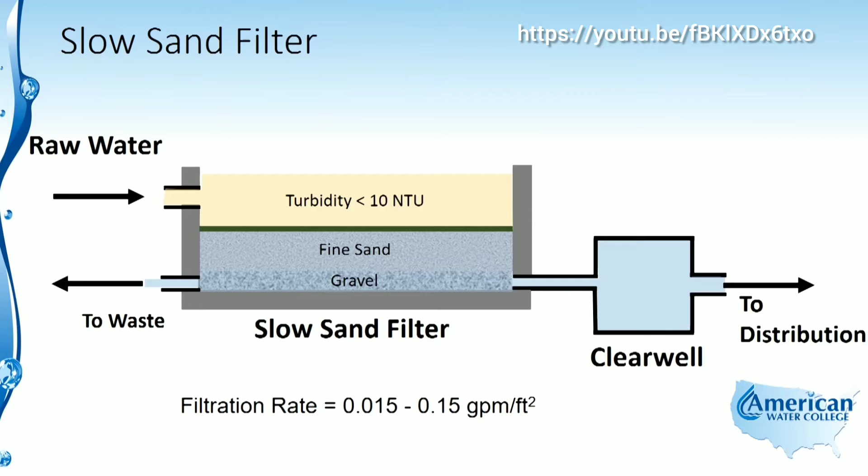So for a slow sand filter, as its name indicates, the filtration rate is very low. It's in the range of 0.015 to 0.15 gallons per minute per square foot of filter surface area. So it's got a very low flow rate in relation to the surface area of the filter, and that's why it's called a slow sand filter. And rapid sand filter.

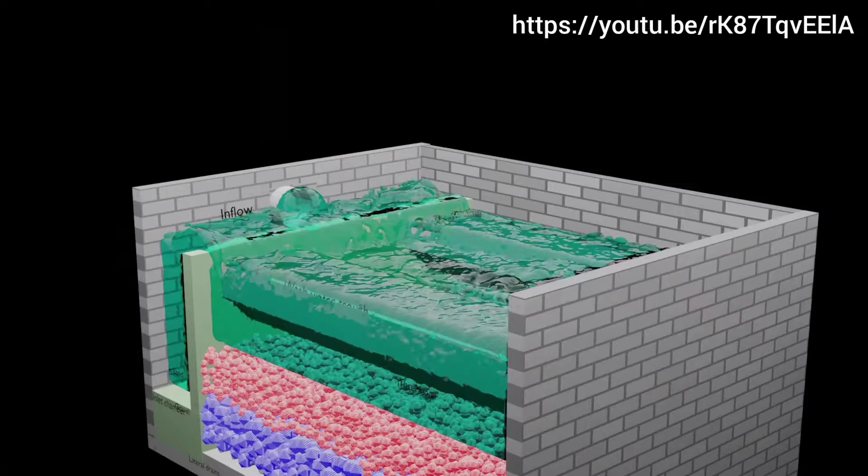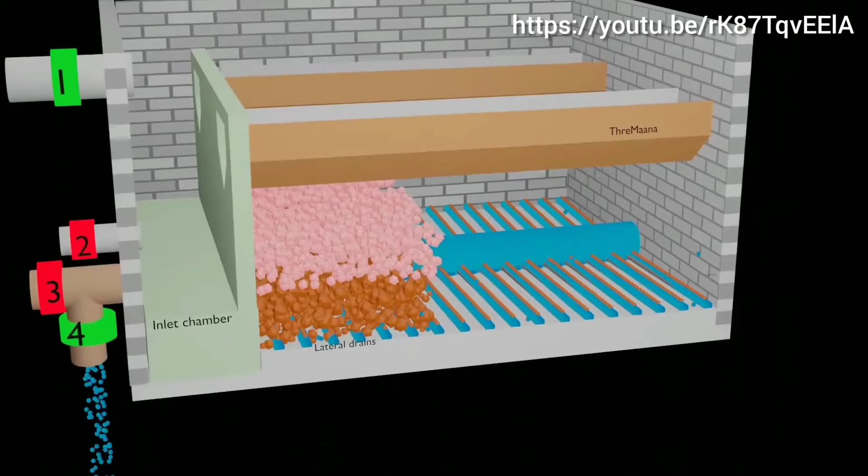Slow sand filter and rapid sand filter. Here, for wastewater, it is the trickling filter. Sometimes the filtering process may be analogous, but for potable water, if the water contaminants have to be removed, the method of filtering is either slow sand filter or rapid sand filter. Slow sand filter is used for small treatment plants, and rapid sand filter is used for

townships, towns, municipalities, corporations, where you want to have the yield of filtered water more, around 1000 to 2000 liters per hour yield after filtration. In slow sand filter, you will get only 200 to 300. So here it is almost 5 times. But in slow sand filter, after the process of filtering, the disinfection intensity is less. But in a rapid sand filter, the disinfection has to be more intensive.

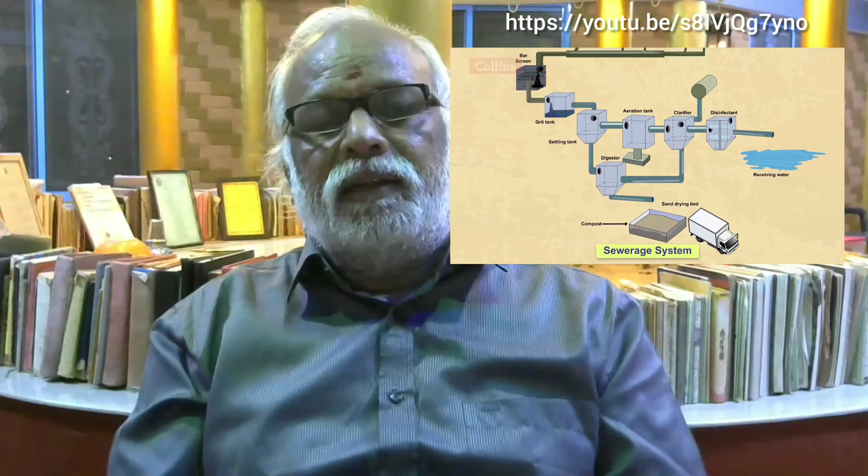Now we have to come to wastewater. So this confusion will be always there when you refer filtering. All other things are same. The coagulation, flocculation, disinfection, primary disinfection, secondary disinfection, all other things are same. Filtering, then storing. So the effluent or the sewage. But here the treatment is not only coagulation or clarification, clarifier. Coagulation, clarifier, sedimentation, filtering. That filtering part

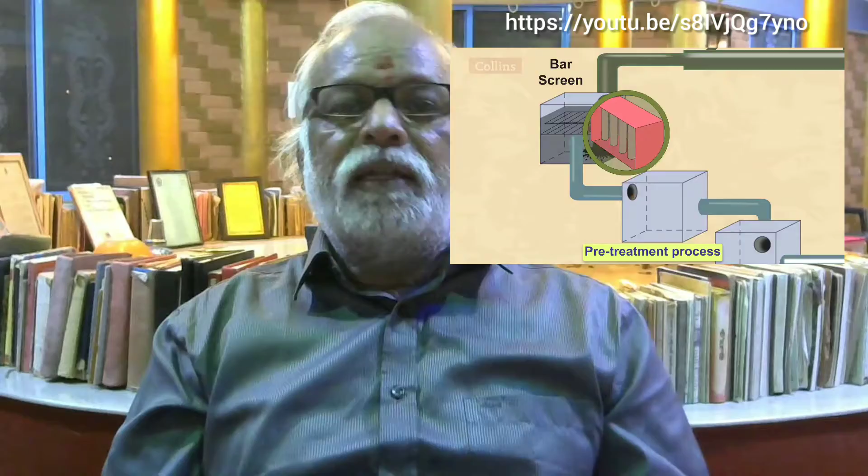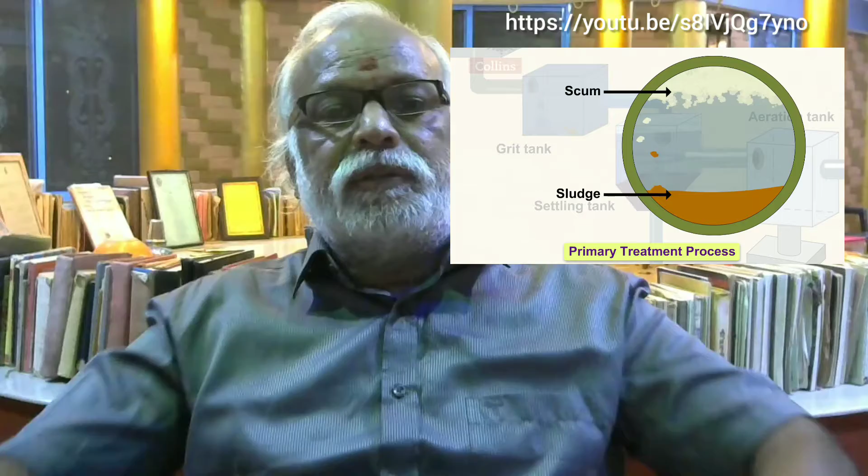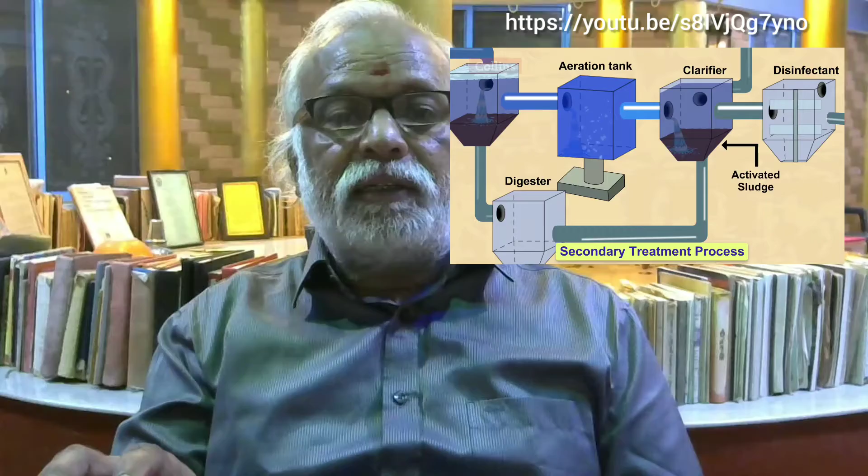unlike slow sand filter and rapid sand filter, it is more biologically oriented. You have a biomass or biofilm. You use bacteria and protozoa, similar organisms, to treat the wastewater. You create an environment by which these bacteria fight with the wastewater, then the wastewater contaminants are removed. These bacteria will work in 2 environments, in the presence of oxygen and in the absence of oxygen. Certain bacteria will thrive in the absence of oxygen. Certain bacteria will thrive only in the presence of oxygen.

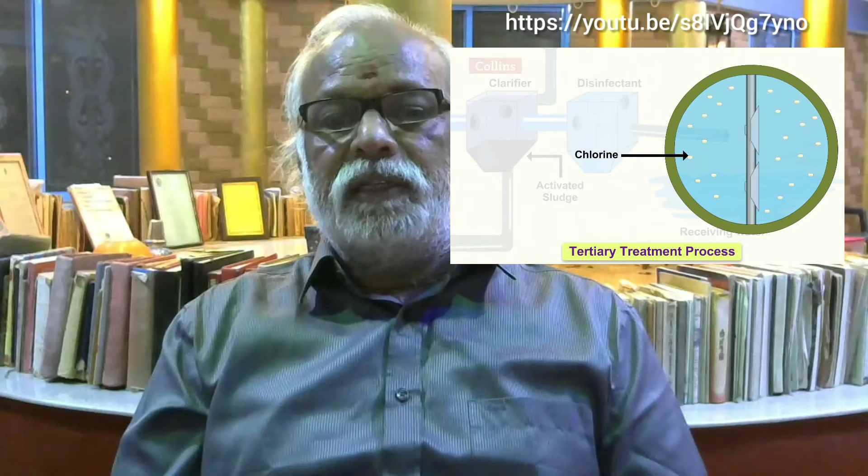So the treatment which works in the presence of oxygen is called aerobic process, and which doesn't require the presence of oxygen is known as anaerobic. So there are 2 types of digestion or decomposition of this biomass. One is aerobic digestion, another is called anaerobic digestion.

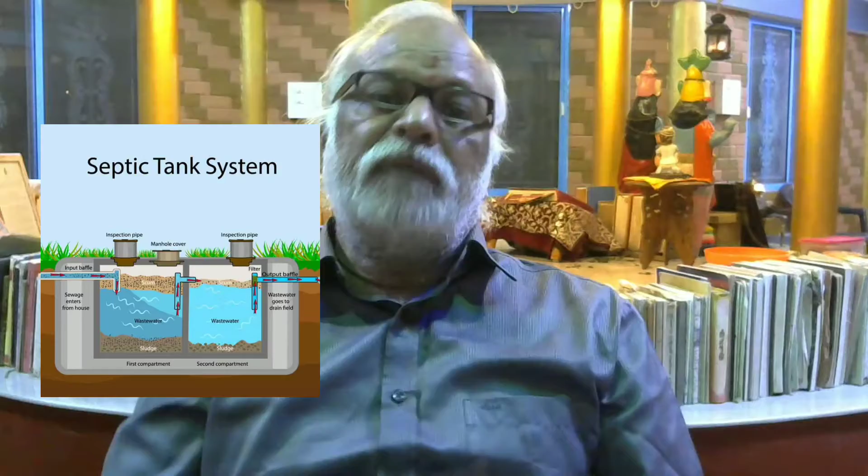The septic tank. Domestic, suppose we take the sewage, septic tanks, the toilet, human excreta, after flushing, along with the water goes through a pipe and gets settled in the septic tank. Sometimes you will have only one well, which is known as the leach pit. And you will have a small air vent. It is not for the supply of oxygen, but to enable the flow and avoid clogging of the closet. So anaerobic bacteria thrive there in the septic tank and leach pit, and decomposition takes place because of anaerobic bacteria,

the biomass. Ultimate result, methane and carbon dioxide. In addition to the sludge, you will have methane gas and carbon dioxide. This methane gas can be used. Similarly, with cow dung, you have biomass digestion cylinders using cow dung, animal dung. You will get methane gas, which can be used as a fuel gas. It is called gobar gas here in Kerala. The government will give subsidy to make the biogas plants.

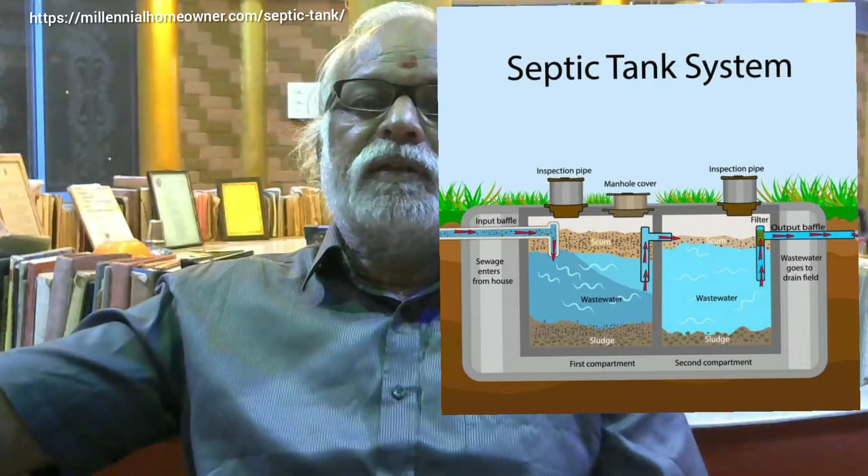So septic tank, we will have different chambers. The sewage will first enter the first chamber, then go on, by which the detention period will be more. So when it reaches there, the decomposition will be over and you will have only clear water, which will go to a soak pit. From the soak pit, it can be discharged because it has reached its permissible level, by which it can be discharged to the water areas. Or it can be used for gardening, horticulture, agriculture, anything.

Septic tank is for sewage because it is from the domestic. Then you have compost. In the domestic waste, you have compost where you put some soil worms, and you put all kitchen waste in layers, then the worms, then some soil. After some time, these worms would have eaten all the things. There would have been a biomass formed, and that biomass is very good manure for plants. It's called compost, C-O-M-P-O-S-T. It is similar to a fertilizer, a manure. So that is the way we treat the kitchen waste.

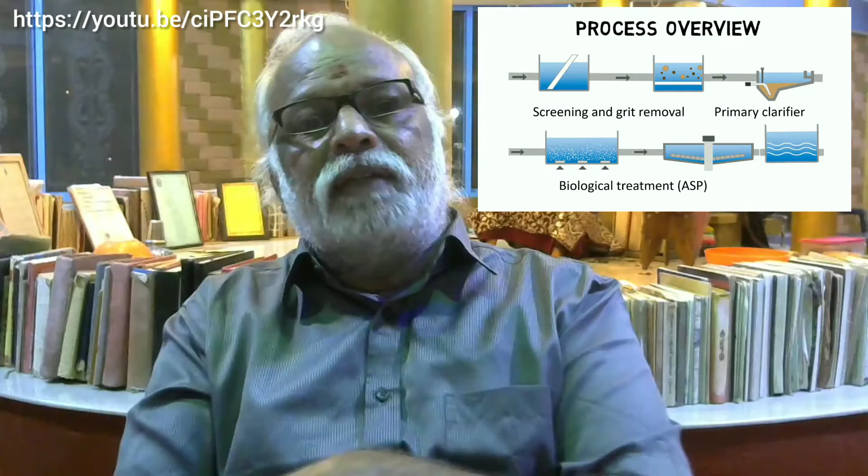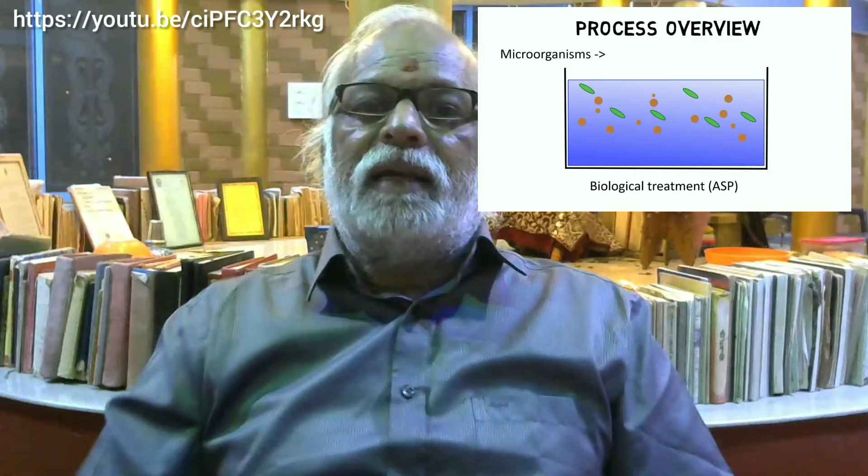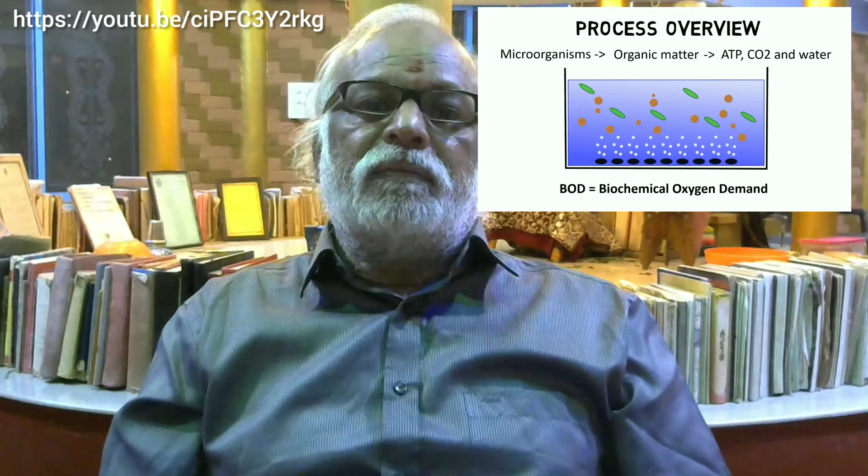Another is the activated sludge process. Activated sludge process. So here you mix them together. The effluent is mixed with the bacteria together. Then as the decomposition or digestion takes place, a part of the digested sludge will be again put back, a return sludge. Certain amount of sludge will be again put, so that the amount of activated sludge will be more. The word activated sludge means it is already in suspension and together with the effluent. So mixed, totally it is a suspended system.

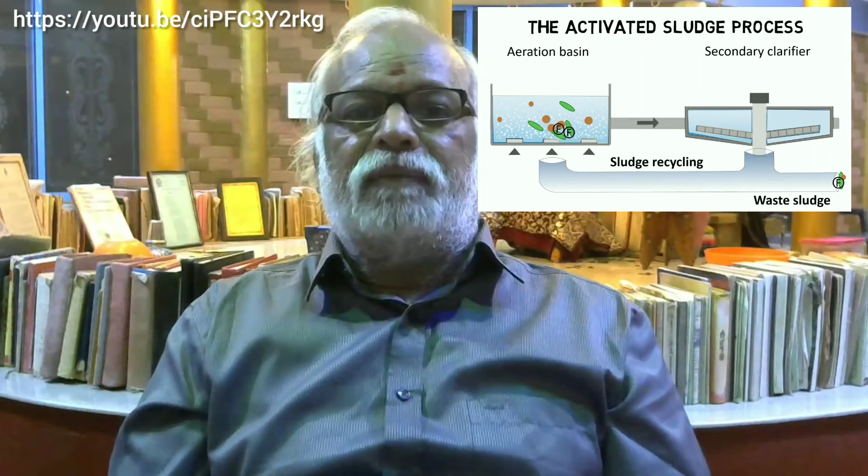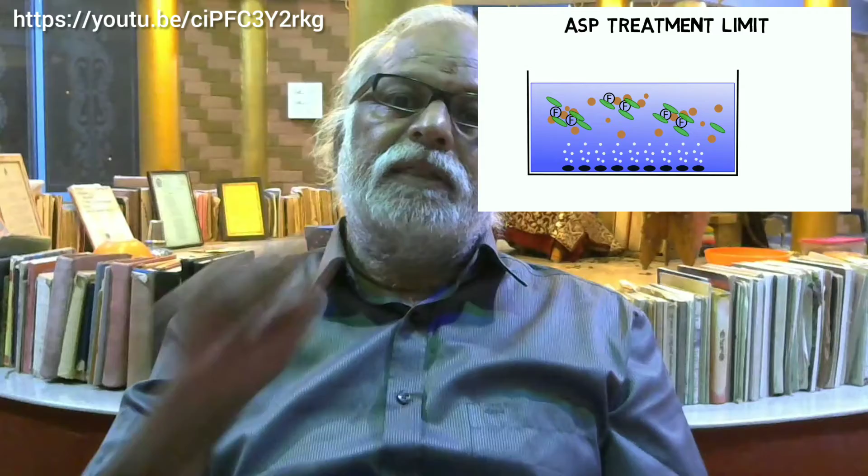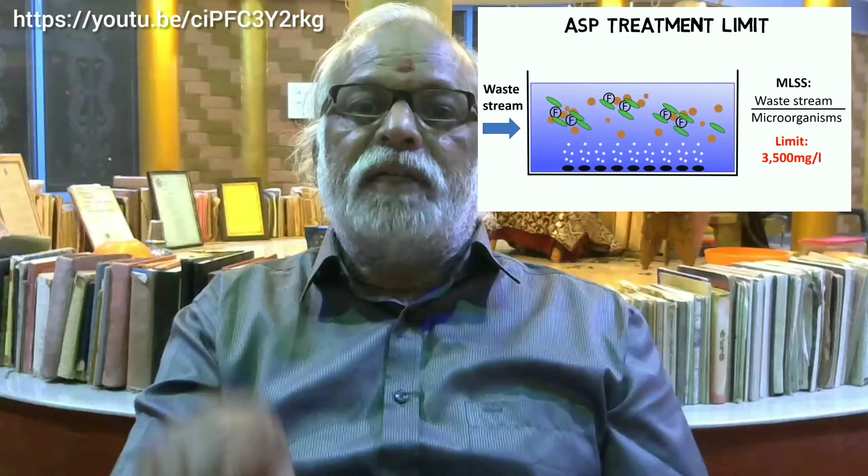Activated sludge process is a suspended system, whereas trickling filter is an attached system. So you have activated sludge process. Usually for trickling filter, efficiency is more. For activated sludge process, the efficiency compared to trickling is less. It is a suspended system. So activated sludge process, ASP, depends on mixed liquor suspended solids, MLSS. Mixed liquor suspended solids. Whereas trickling filter depends on the organic load. Okay?

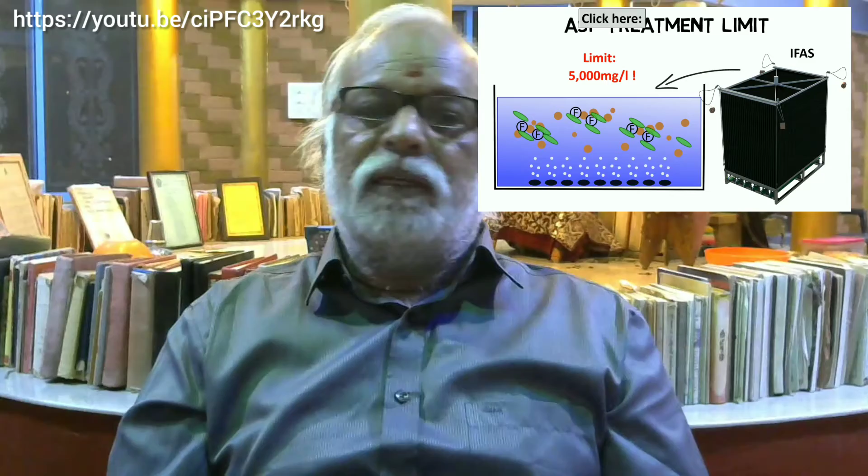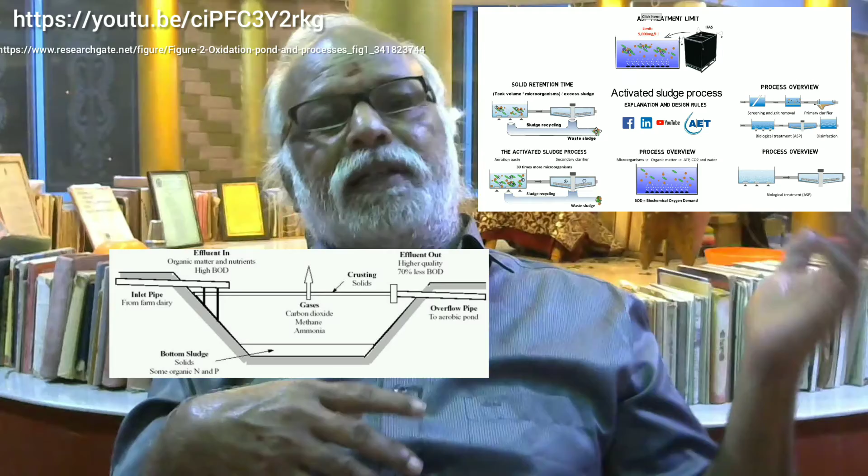Then you have an oxidation ditch or oxidation ponds. The huge ponds where you will discharge the effluent, and the pond will have algae, water plants. So these water plants will have a lot of oxygen to supply. So naturally, these algae which are supplying oxygen are the natural aerators. Oxidation pond is nothing but a variety of activated sludge process. So these are the various wastewater treatment systems for sewage as well as for effluent.

So I consumed a little more time today because this part can be wound up today. And for all these things, you need a lot of space. Just see how many processes are involved: coagulation, flocculation, sedimentation, activated sludge process, oxidation pond. All of them need a lot of acres of land, and they have to be together also, an open space.